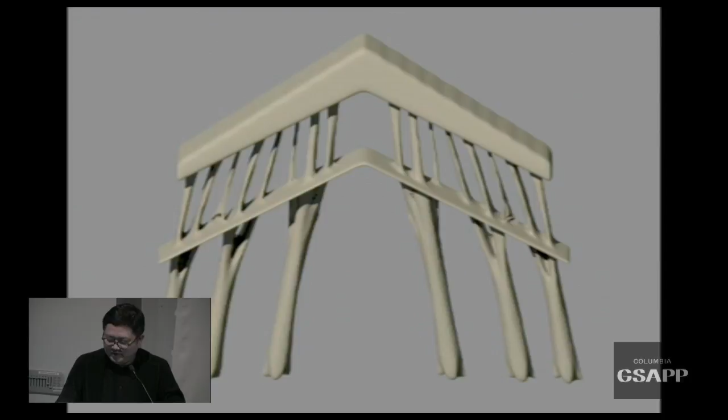This is an interesting structural performance simulation put forward by Mike Xie, who is a colleague from RMIT Australia. He made a very interesting simulation with hanging of one point and two points. With one point hanging, the apple is the best form in the world. And with two points hanging, the best form is the Catenary arch. Also the simulation of the Sagrada Familia, the facade designed by Gaudi, is also based on this kind of thinking methodology. So from this kind of simulation, we can understand what is the best form in the world.

So in the lecture of Mike Xie, I put forward a question to him: if you're talking about the hanging, the apple is the best form, why do we have the pear? It also has a hanging, but it looks different to the apple. So that is the question to the simulation, this kind of technology.

Are they saying this kind of new method will totally change the thinking process or replace the designers? So the question Mike Xie gave to me is that not only the hanging point, but also the seed of the apple and the pear are different. And another force is growing as a nutlet in the middle of the apple. We also have other forces that change the apple and the pear, making them grow differently.

So I think humans and machines right now are collaborating with each other. It's just like the hanging point, and also having a core, a seed inside the core of the creatures. We produce a different formation process of nature.

So tonight I would like to put forward three topics, from new materialism, to craft-driven materialization, to human-machine association.

New materialism moves us beyond the discourse of representation to a discourse more aware of material process and expression. Yet it's not that new materialism seeks to displace or dismiss the representational logic of the late 20th century, as if it were redundant. Rather, it seeks to emphasize that after years of stressing the importance of representation, we need to redress the balance by paying greater attention to process. Indeed, the two discourses, of representation and of process, are not mutually exclusive, but one invites the other.

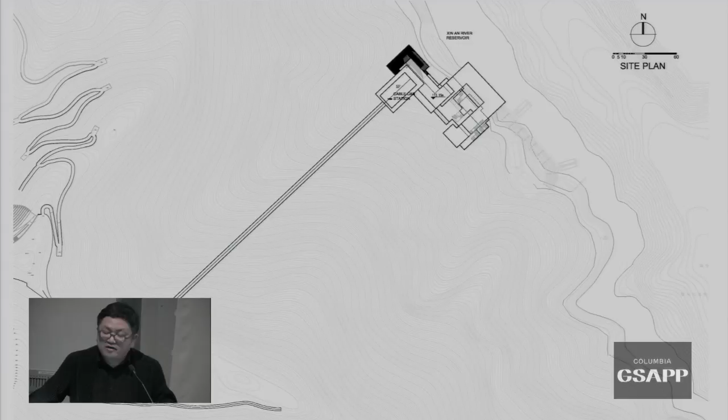So we were thinking about the new landmark, how it can embrace new travelers and also bring a different experience to visitors. The original concept is to integrate the building with nature, and how this kind of building can grow in from the mountains, and also anchor into the rockeries. I hope when you have a first glimpse of the local scenery, it should be difficult to figure out where is the building and where is the nature. So that follows Chinese philosophy: man is an integral part of nature.

Well, how can we manipulate the design process to realize the conceptual goals? Here is the formation process. We define an agent system that could represent the simulation process of how the rockery of the mountains grows up. And the protocols represent the intelligent rules of how to predict the future growing process, from the rockery to the building. So the basic logic comes from the local topography of the mountains.

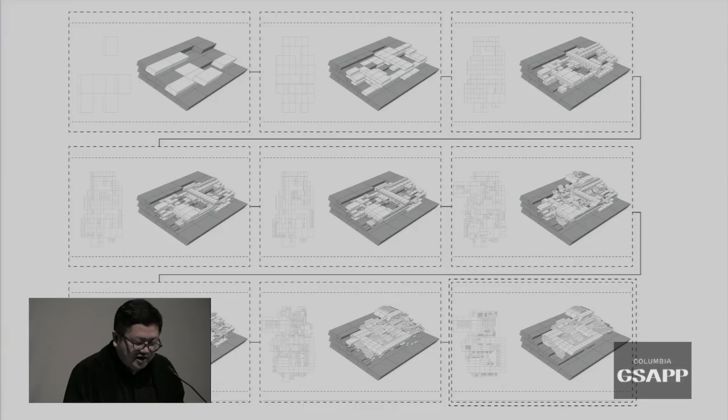So architecture is the landform we're looking for, and the landform is the architecture. This is the form-finding process, from the prototype, by a bottom-up process, to simulate how the building grows from the rockery, expanding out to fit into different kinds of functions of the buildings.

So these are models we made, and here are the final models to represent the process. But actually the process is not just a final result — it's a growing process, how to integrate the programs with the geometry of the mountain.

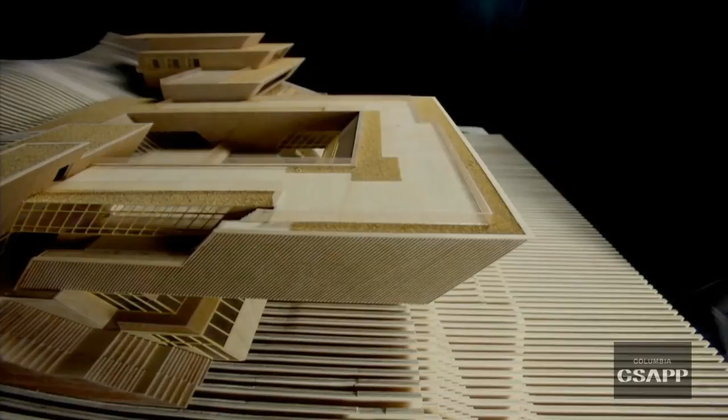We have a very big cantilever reaching out to the lake. So we have a beautiful scenery in front of the mountain, and the cantilever makes a shading space for the parking, and people can come in and sit outside as the entrance of the national park.

The cantilever is 30 meters, very big, pushing out from the mountains. It has different floors. The plans are still in the design process, because different heights need careful operation of different details in the design process.

You can also find the reflection of the water and the integration of local material. It's a kind of laminated bamboo. We use it as a facade for the building to make it very close to the local materials.

We also set up different systems, including the structure system, most importantly because it's a big cantilever. It's a steel structure system anchoring to the nature. When we make the construction, it's a very complicated process involving different kinds of structural simulation and optimization.

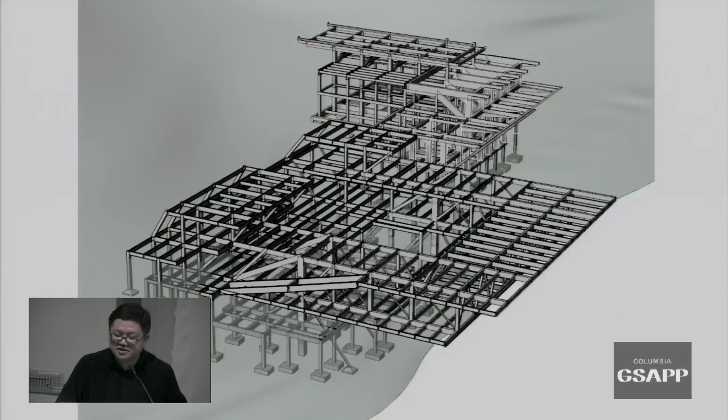After finishing the building, when the cable car comes down from the mountains to the platform, you can find the frame of the building framing the beautiful scenery in front of you. It's just like standing in nature, and the frame is set up at a certain distance from you to the nature. So this part is finished.

You can see the building with the mountain, the building with the lake, and boats boating on the lake.

I would like to highlight the final images. Here is the original concept of the design: how to integrate the building with the nature.

The logic of the form-finding process comes from the prototype of the rockery, growing into a certain form fit to different kinds of function programs. When we leave the site, about 1 kilometer away from the buildings, it's difficult to figure out where is the building and where is the nature. That is the dream. Also in the philosophy of China, the building should fit into nature—it's growing together. That is the basic idea of how the growing process, the form-finding process, makes the whole design concept.

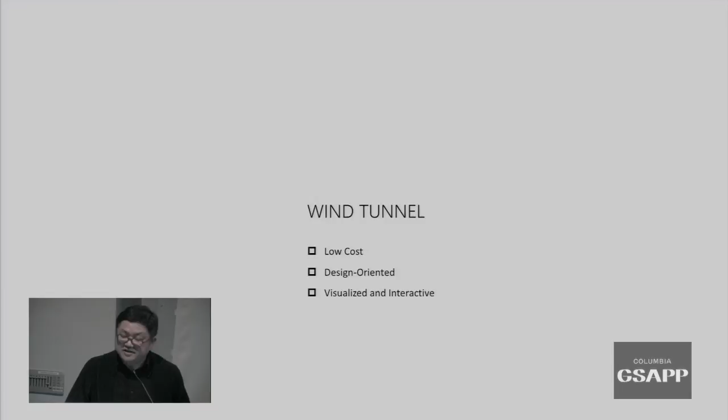The second part I want to introduce is another tool we developed in our office: the wind tunnel. Normally the wind tunnel is in a structural engineering school—they spend a long time researching it and spend millions of RMB. It's very expensive, and normally difficult for designers to use. But we're trying to develop a low-cost, design-oriented visualization process for use in the design.

So the wind tunnel could be part of the design partner in the early design stage. This is the first wind tunnel we made. It's around 4 meters long, something like this. The first one could simulate at a scale of 1 to 500 or 1 to 1,000, but this is too small a scale.

So we made a second one. This one is 12.3 meters long and can simulate at a scale of 1 to 200 or 1 to 300 for high-rise buildings.

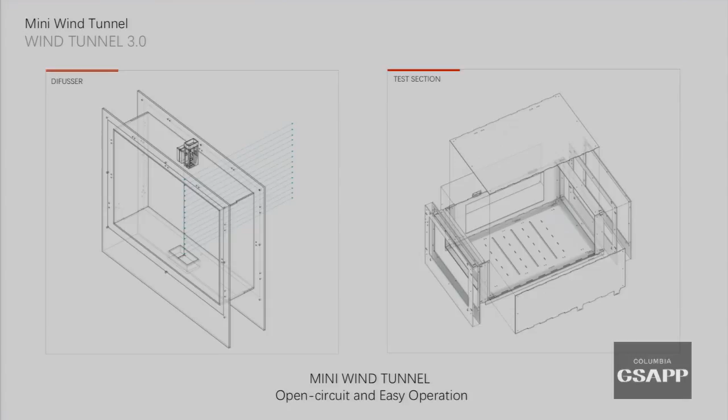After that, we change different sections of the wind tunnel to help us make different kinds of simulation. The left one is about smoke wires, which can visualize the wind passing through the buildings. The right one lets us change the location of buildings in the urban environment to get feedback on how ventilation and wind can change the formation process of the design.

So this is the real one—we change different things. This is the smoke wire process. We put in high-rise models, like Lego, in the early form-finding process in the wind tunnel, and use a camera to record videos, slowly revealing how the wind passes through.

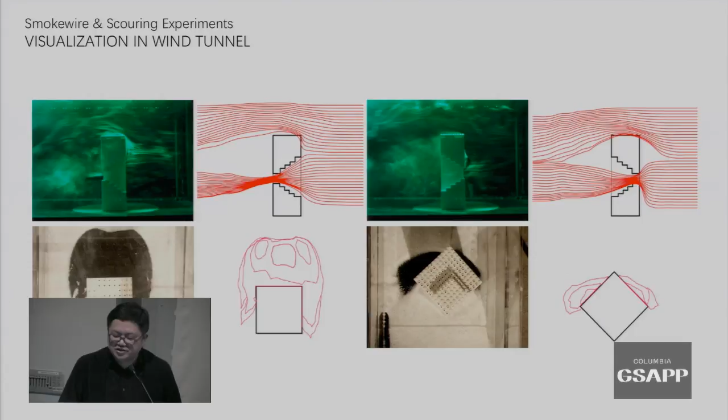We also use scouring experiments, putting sand on the ground to test pedestrian-height wind conditions, giving feedback on wind patterns at the podium of the architecture. Here is another simulation: the left one is the smoke wire simulation for a certain building height and typical plan geometry, the right one is a CFD simulation, and the bottom tests pedestrian-height wind performance.

Through these kinds of experiments, we can very quickly get feedback on different geometries in the design process.

We also try to use not a stable building—not just one single building. If we have 3 or 4 buildings, we can change the location and change the initial logic for the form finding. This is a twisting system we make through Arduino.

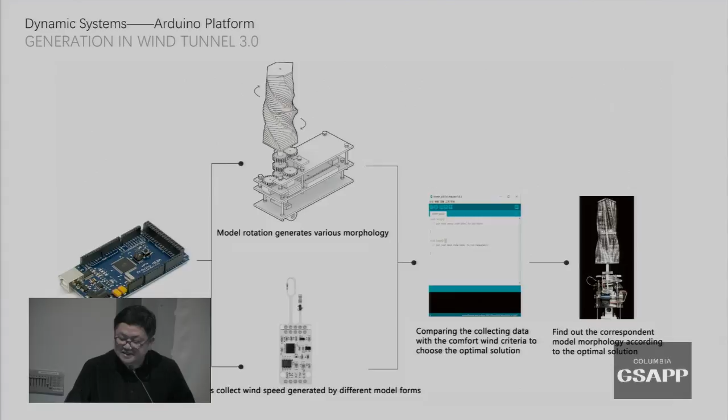So this is the process for the form finding itself—the twisting by the location of different buildings. The result is interesting because we can figure out if the podium should be twisted or the top should be twisted; different angles will make different geometry for the high rise.

Based on that, we participated in Shenzhen Biennale 2016 and won the award by the methodology we used in the wind tunnel. So it is a huge model.

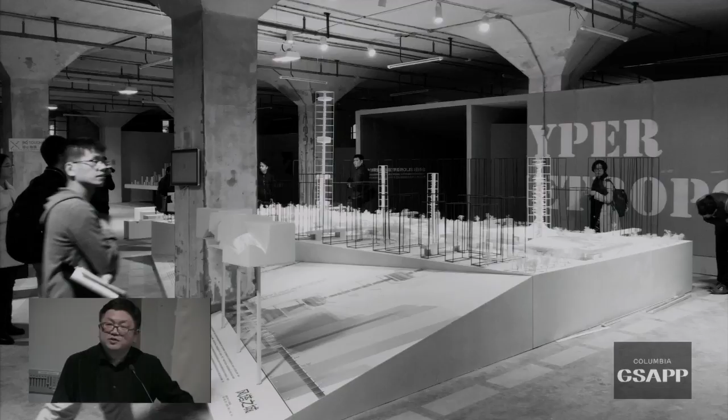We made research on the isolated district between Shekou and Qianhai, two districts. Originally it's a very long railway track, keeping like 80 meters width and 12 kilometers long. We tried to make research on this district.

We use the idea that we can design a certain kind of infrastructure system. I think in Shenzhen, if you visit China, it's a very good location for living because people can live there maybe all seasons and stay outdoors. If you have a shading system or good ventilation, it will be very comfortable to stay outdoors.

So we try to put forward the idea that we can design an infrastructure system that can control the pedestrian height and the wind speed, so people would like to stay outdoors and enjoy high density street life. The infrastructure system for the high-rise is not programs like apartments, office, or hotels, but could have some public function for the city.

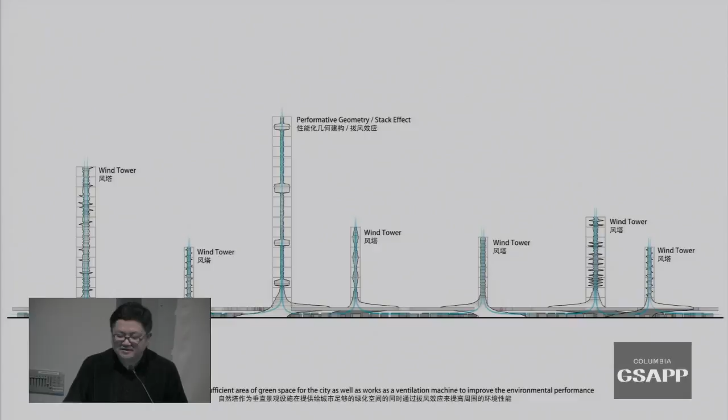This is the matrix of the wind tunnel, the wind tower, which can control a certain scale of the urban space. If the wind is comfortable and the shading is comfortable, we can produce a very livable space in the city. That is the basic idea based on this kind of new technology simulation.

So we can see the video in this waste isolated land in downtown Shekou. The right hand is Shekou, the left hand is Qianhai—a very representative developing district. But in the middle is isolated space because of the railway cutting through. So the government wants to reuse this piece of land.

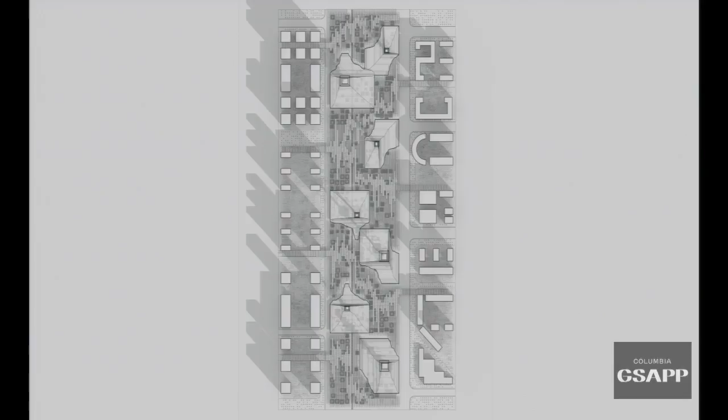So we put forward the idea to set up an infrastructure system to change things. Maybe in the future it's a bottom-up development process, and this kind of big canopy with a very high chimney or wind tower can control a certain scale of urban space and make a different urban future.

Although the typology in China is all high-rise similar to New York City, in the Shenzhen Biennale we tried to put forward that the infrastructure system should not just be horizontal for pedestrians, not just hidden underground, but could vertically change the urban quality and the wind—putting a bird tower, a plants tower, and observation functions in the buildings.

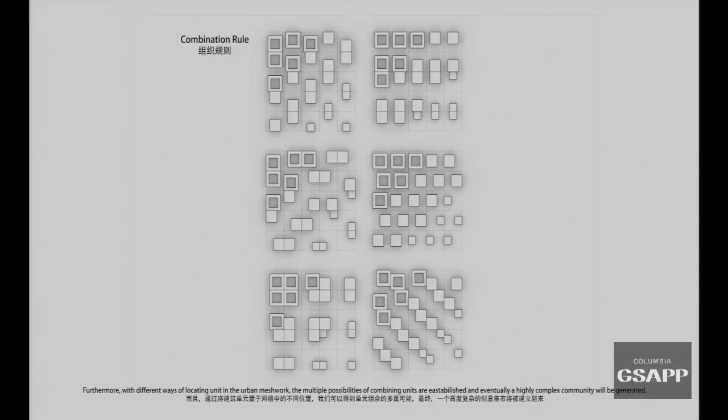We also make some very small, high density, super high density blocks on the ground which can grow slowly in the city and could be reorganized by itself. Maybe it's a utopian process, but we put forward this idea for the future of Shenzhen.

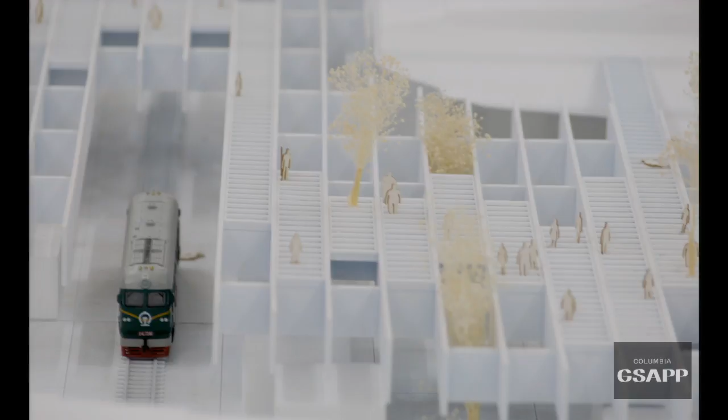So the infrastructure can link two parts of the city, and based on the traditional railway, we can make some commercial programs under the shading of this super big scale infrastructure system, and the wind tower can produce some public functions for future cities.

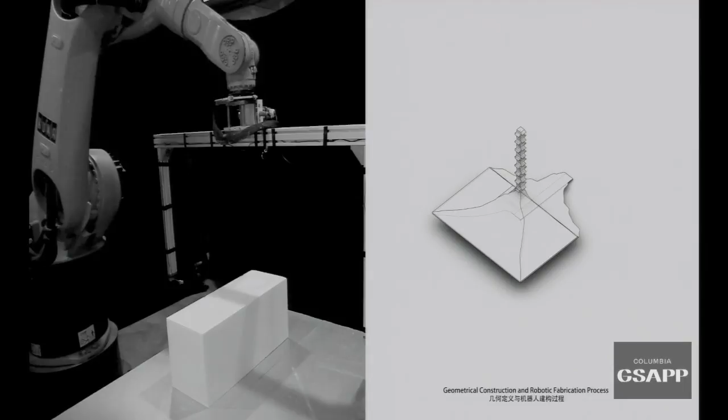So the model is like 100 square meters. It's a very big model, but we spent only one month to do it because we used this kind of robotics to cut and make the formation process for the high-rise.

So this is a podium for the high-rise.

Okay, this is one project, so it goes to the second part. I would like to talk about some of our early work, craft-driven materialization. Some of the projects are based on the understanding of new materialism as a generation process in mere material itself. We have also begun to deeply explore the human-driven material formation process. Here, what I mean by human-driven is referring to the production aspects of the building life, rather than going into the discussion of constructing particular human experience. So craft also becomes a driving factor in our design process, to review the relationship between the human and the building form in the materialization process.

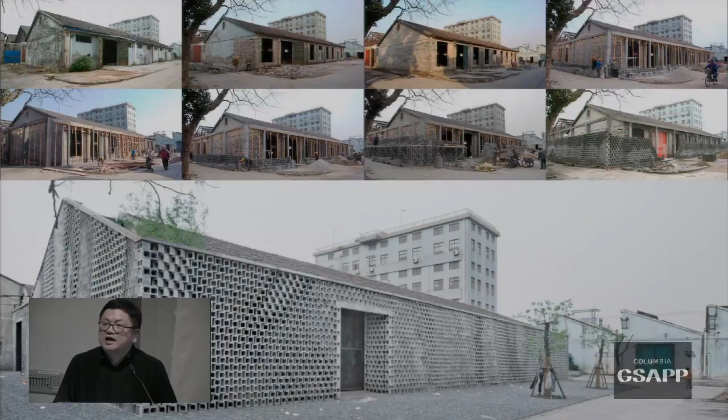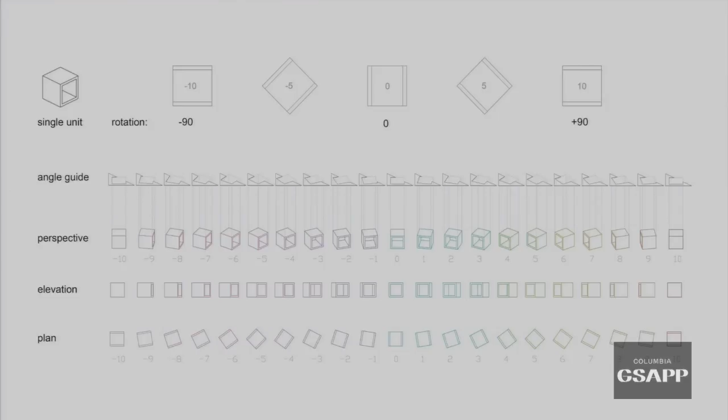Bricks are an extremely cheap material on the construction site, so we selected them and made a design using this kind of diagram. The detail drawing here isn't detail like other buildings, but we designed a certain kind of ruler - like a modular system - to label them with different numbers in the detailed drawings, and to teach the workers how to position them in the right location. Just place the ruler there, and the workers can put all the bricks in the right location.

These are the local workers we worked with - they spent only about 2 months to construct the whole walls of the building. The elegant detail of the facade comes from this kind of rotation - rotating the degree of the bricks can create different kinds of performance for the facade system. So this is one of our early works.

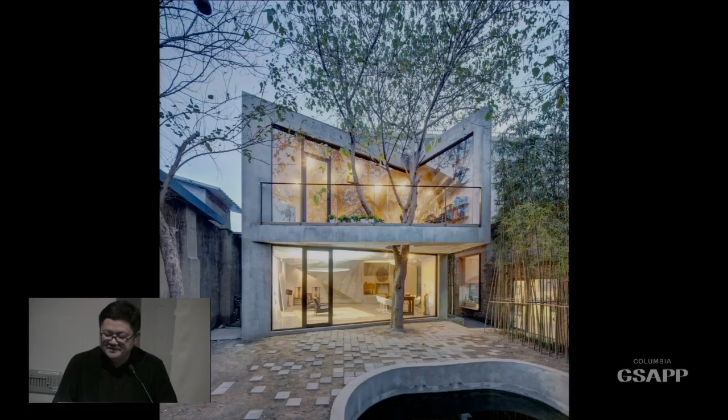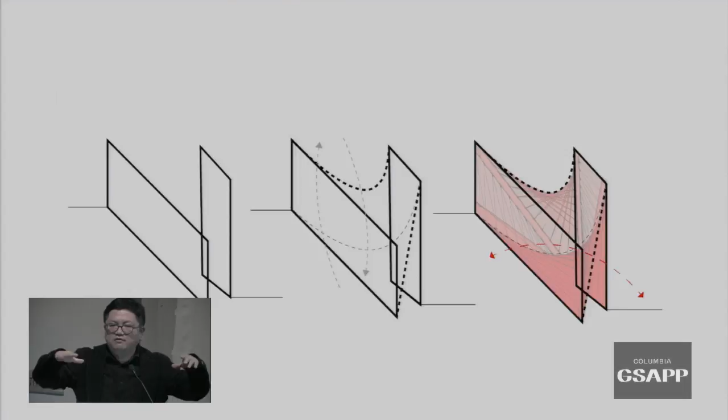So the geometry sets up two kinds of frames - one is the entrance of the stairs, another is when you're passing through to get to the second floor, you have a frame of all the leaves and trunks of the trees. So it's two geometries, kind of a transformation through some roof surface for the design.

How to construct it - 10 years ago we were facing this kind of problem, so we made a 1:2 model in the corner and taught the workers how to construct it, because from drawings they could never understand this kind of very complicated geometry. They couldn't construct it, but following the model, it was easy for them to position and construct the whole building.

After that, in 2015, we were thinking about how, from these basic fundamental tools, we could generate something more meaningful. So this is a Fab-Union Space on the West Bund of Shanghai, which is a gallery space for exhibitions. We have two kinds of programs - the right hand is 25-meter tall buildings, the left hand is a 3-story floor. So how do we make a connection between them? We have a special circulation space in the middle.

We were thinking about this because concrete structure can never have a span like 50 meters, so we wanted the circulation to become a structural system - how the structure system could be not only the circulation system but also the structural support system. That's the original concept for the design.

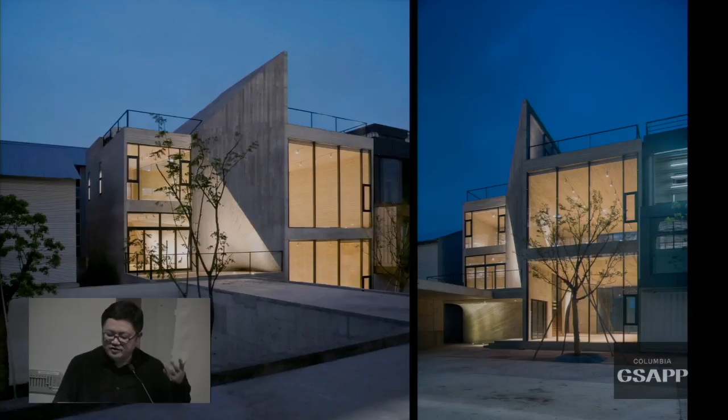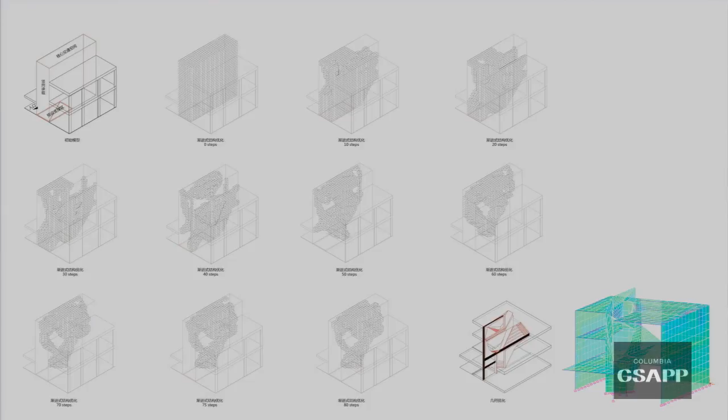So we just reduce the material step by step, generation by generation. This is a process where we take a whole solid concrete block and reduce the material. We make models to present this building in the GSD exhibition last year. The left one is a solid concrete system, and step by step we take away the concrete material. Using this kind of BESO algorithm structure optimization tool, we can find a form like this. So this is the design process.

So in this case, it's totally different from the first building we presented, the tea house. The tea house geometry is just a form, but here the geometry transfers into a structure system.

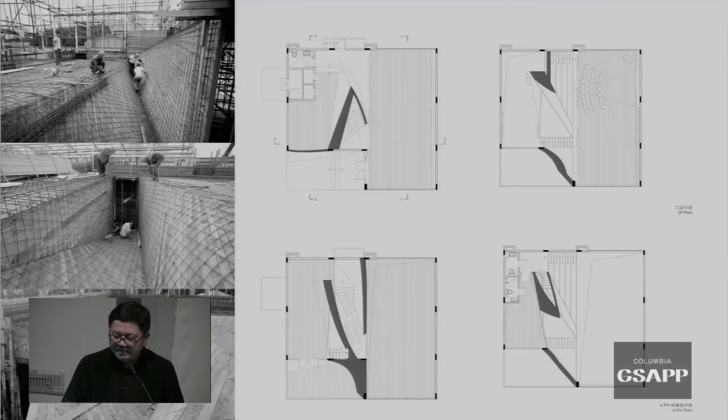So in the construction process, we need to think about how to construct the buildings. From the plans, we can see the wall and the floor look very thick, but actually it's not so thick - it's just because in section it appears very thick. We drew a lot of sections and tried to teach the workers how to construct this building, but it never worked, because these sections can never represent the real depth of the floor - it's all diagonal, cutting through it would be extremely wasteful.

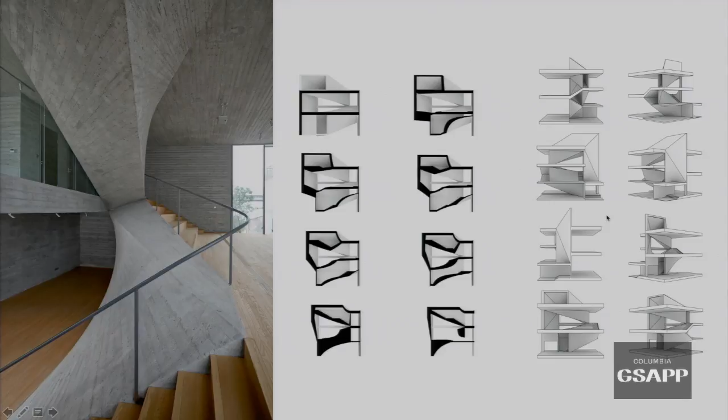So we made a lot of models to teach step by step, floor by floor, to the workers. The models became very useful in the construction process. So after the building was finished, it looked something like this.

The folding walls became a support structure system for the whole building. This isn't visible from the exterior. Normally a building transfers forces straight from the upper floor down to the ground floor, but in this building, based on simulation tools, the forces are transferred in a folding path from the second floor to the ground floor. And the inside edge is stairs.

For the light, we use two kinds. One is the roof light, washing the concrete wall. The other is parallel light, also washing the whole space. So we're showing two kinds of darkness on the concrete, revealing the heaviness and volume of the whole building - a very strong experience when passing through. At night, the building lights up like this.

So when we go to the second floor, you can see the left hand is the outside stairs, and the right hand is the inside stairs. Going from outside to inside, this folding and unfolding process gives a totally different experience.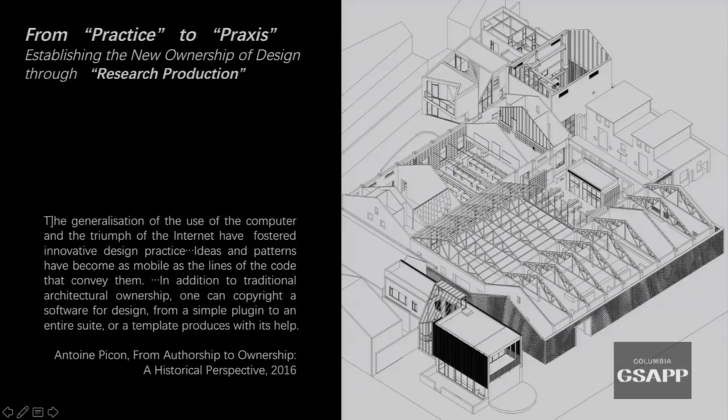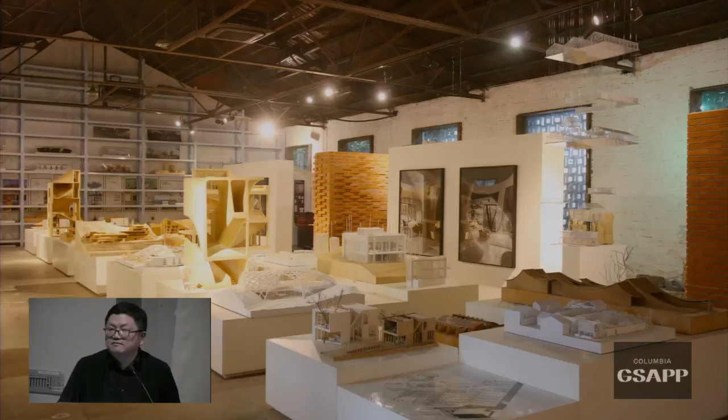In the exhibition space, we can figure out all the models tracing what we're doing, different kinds of experiments in all of our projects. Actually, a lot of mock-ups, one-to-one scale mock-ups in the office, because we try to test the material, the making of material, and to redesign the process of materialization of future architectures. And also in the laboratory, we have a lot of tests, and most of them test to failure.

Through this experimentation, we want to establish a new kind of credibility. Because the credibility for the future generation is not just meaning you can design a building, but if you can design a tool, it's also meaningful. Actually, the signature and credibility for future architects could be based not just on making a spatially meaningful test, but also on setting up a new kind of tool with you in the office.

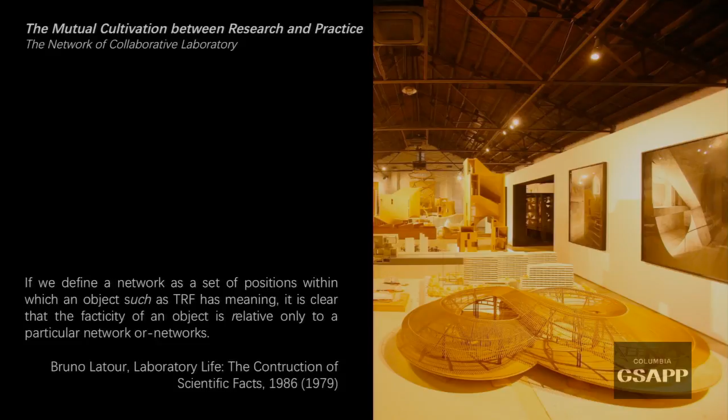In this situation, we're trying to figure out the relationship between what is practice and what is research. We could create a very interesting relationship between design research and building practice. Analogous to Latour's notion, what is the scientific result of future architecture, which has meaning to position us in new networks? The networks are not just one university, one professor, but should be networks of a lot of new generations—artists and architects from all over the world, and professors from different places coming together.

That's why in the last 7 years we set up a Digital Future Shanghai special event. We make a group research on robotics. We try to set up a new model for future research.

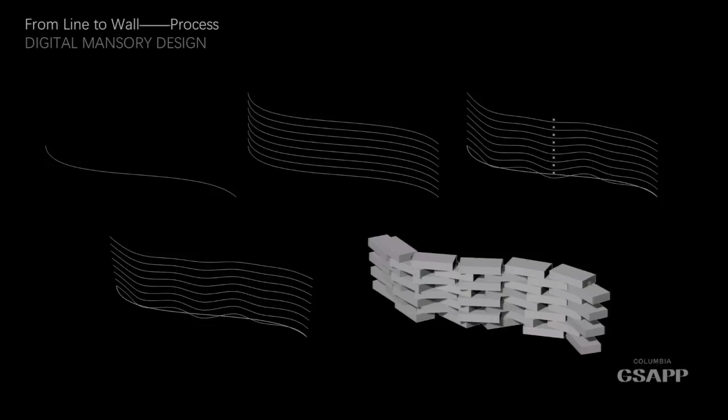For example, this is just one example on the research of bricks, from line to wall, how to use Grasshopper to find a certain kind of form. This is also another Grasshopper model to set up different parameters. The parameters can change—we can change the information, the data, to make different kinds of forms.

But the form is not easy for construction. Based on our tools, it will be extremely efficient if you want to make any brick, any form based on the bricks. And also this is from surface—not from line—from surface to the wall, from box to wall. We have different kinds of toolboxes developed.

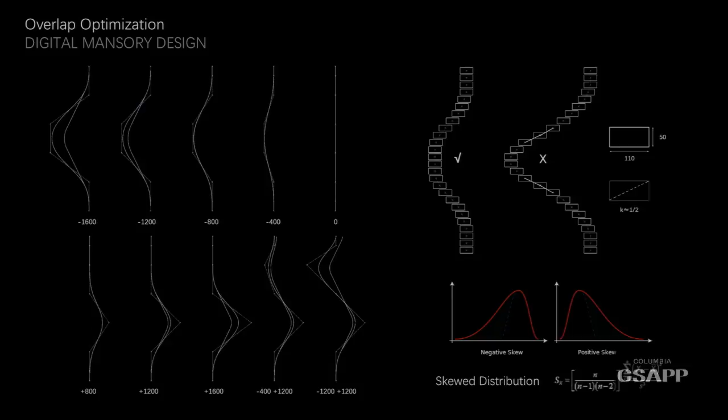The most important thing for brick masonry is the overlap part, because that should be based on finite element simulation and optimization process. The overlap should be carefully calculated in the computer by the structural engineer. But based on certain kinds of tools, we can implement the Grasshopper plugin tools to design the reasonable form of the brick walls.

So this is a process of how to put the rebar, how to organize it, and how to bend the rebar for a certain kind of twisting in this kind of brick wall. It's all toolbox development—this is just one example.

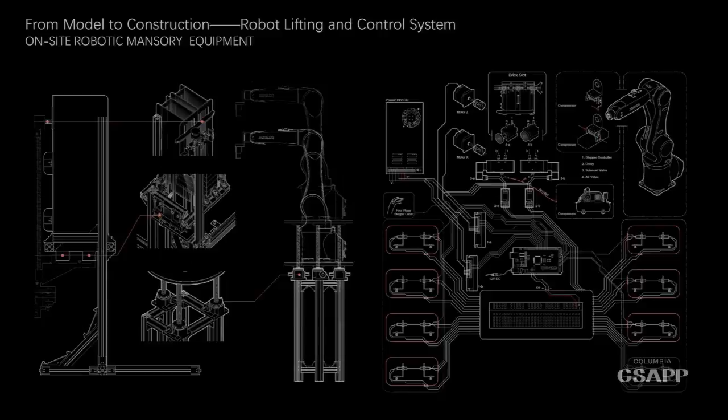So we develop not just the design process, but also the tools—the on-site robotic masonry equipment. This is generation 1, which we developed in 2012, from model to construction. We use these tools to feed the bricks and make the equipment work. With this machine, we first did this wall, because the twisting wall is all different—we needed to position the equipment 4 times on site to place each brick.

But this is too small—the robotics is very small. It's not very efficient. So we developed a second generation. It's like this.

So this is all the drawings and the robotic tools we developed, including the motor feeding system, and also this is the bricks, how the bricks are supplied to the robotics. These are all the details we did.

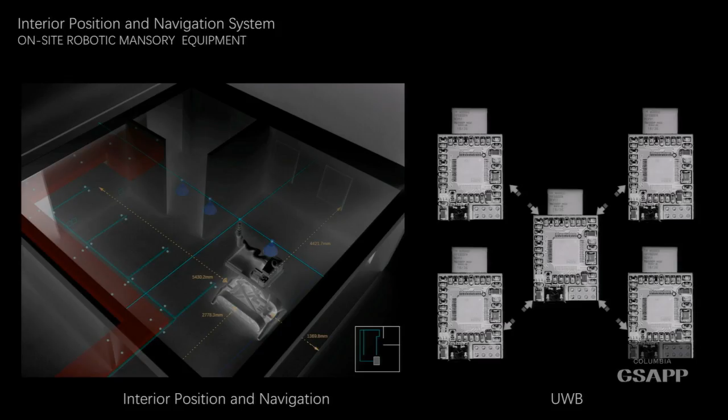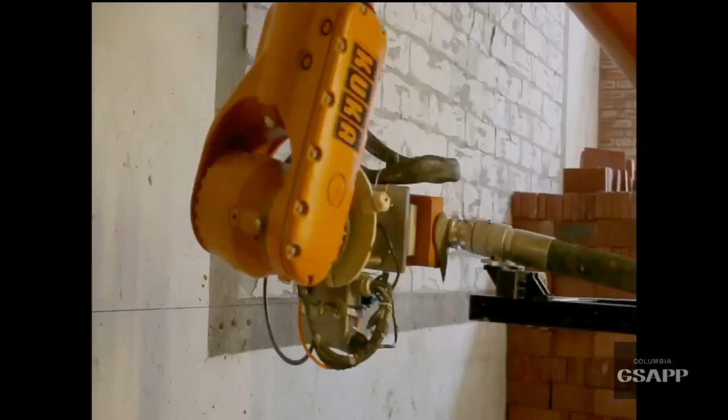This is a simulation in the computer, and the construction I will show you like this. This is the tool we developed. And still we need workers to clean up all the details, but this is the basic process. One of my PhD students is doing this.

Using this special generation 2, we make the wall like this. The brick layer walls, the inner layer is the insulation, and another layer is the concrete — a sandwich system of the architecture system. Architecture facade system. This is the building we design.

We teach the fabricator to buy several robotics for their factory to make the wall. It's prefabricated in the factory, piece by piece, sandwich style, and hung on site, floor by floor. So this is the process.

I wanted to put forward the example of human-machine collaboration. For the designer, it's not just designing the facade, but designing the whole process, including the equipment, including the tools, how to construct the building like this.

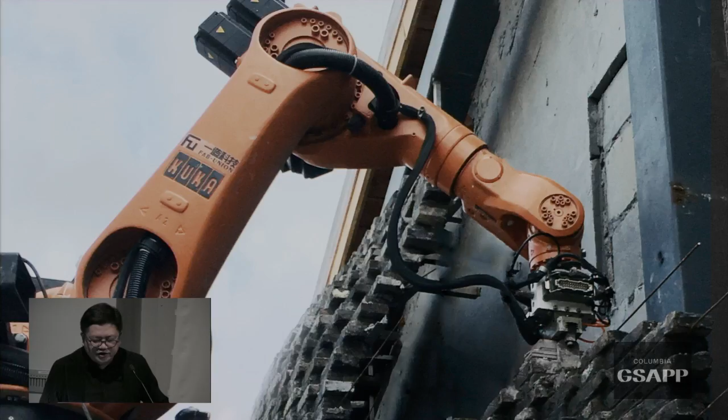Another one is Chi She — this is on-site work, not prefab. We went to the site, and this time it's more challenging because the location is west of Shanghai near the Huangpu River, near an airport district, with a lot of waste warehouses and waste bricks everywhere. It's an urban renovation project, and two artists want to develop an art gallery space.

So we shrink the initial exterior walls, followed by performance and structural refinement, in order to provide maximum exhibition space. The concept is to gradually change the bricks, from wall to rain shade canopy — kind of from typography to the topography of the space.

The integration of reused bricks on site — because this material is rough and not accurate — but the robotic can do it very accurately and precisely, putting them in the right location. It's very interesting: very rough bricks made into a very precise and accurate position, making the building very special.

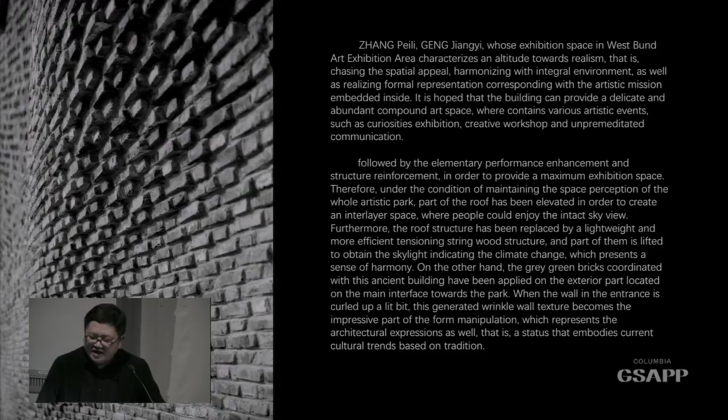The bricks coordinated with the building have been applied to the exterior part, located on the main interface towards the park. The contrast between this roughness and the accuracy makes the building special. This is the facade in the poster, and the actual location is here on the riverfront of Shanghai.

The design process is not so easy. Actually, as architects we evaluate using structural performance imaging tools to simulate displacement, stress, and wind load, and also how to integrate this kind of structural performance to design the density of the material and put it in the right location.

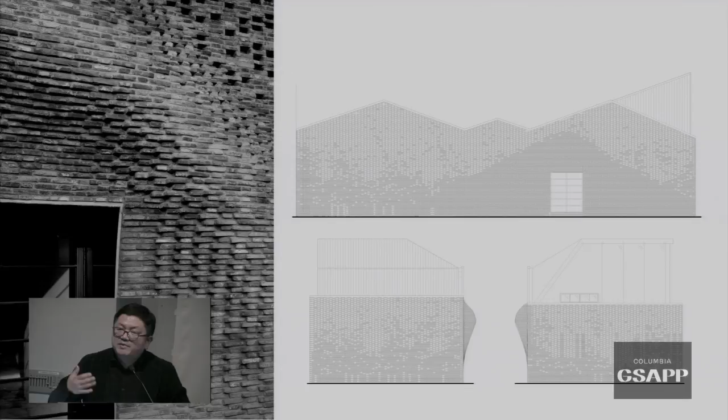It's all a form-finding process to simulate precisely brick by brick and teach the robotics how to construct locally on site. We also have some steel structure hidden in the back.

The roof structure has been replaced by a lightweight timber structure. We also designed part of the roof to let light come in and illuminate the special wall, creating a special space for the gallery.

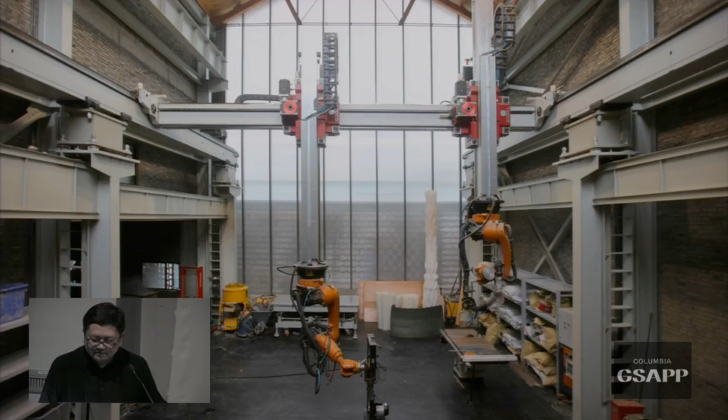So this is the lab, and based on that, I'd like to introduce a project finished two months ago — collaborated with Achim Menges and my team. Martin, one of the PhD candidates from the University of Stuttgart, came to Shanghai to collaborate with two of my PhD candidates, and they spent 1.5 months in my lab constructing the whole pavilion in Shenzhen.

Shenzhen newly opened a contemporary art museum, and they collected these pieces — it's still being exhibited in Shenzhen right now. We use plywood as the material, and the sewing machine serves as a special tool to create a new material performance for this installation.

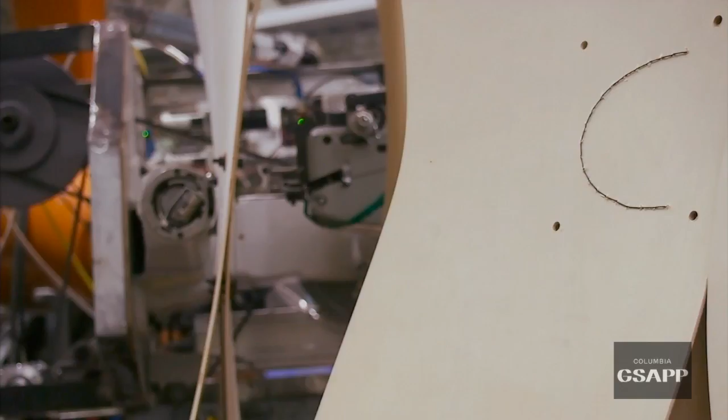All the details are specially designed, and the whole formation process is based on the structure. By folding them, we create a self-supporting system that stands up by itself without any hanging material — a self-standing structure made of two layers of plywood, sewn by the machine to make certain joints.

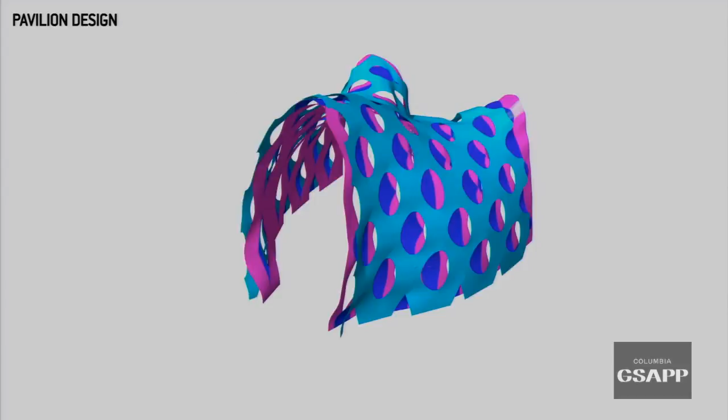The sewing material is carbon fiber, 2-centimeter radius carbon fiber, weaving the wires through the plywood, which is 3.5 millimeters thick. We cut it using a 5-axis CNC in my lab, piece by piece, cutting all the components, then folding them into certain forms and sewing them with robotics.

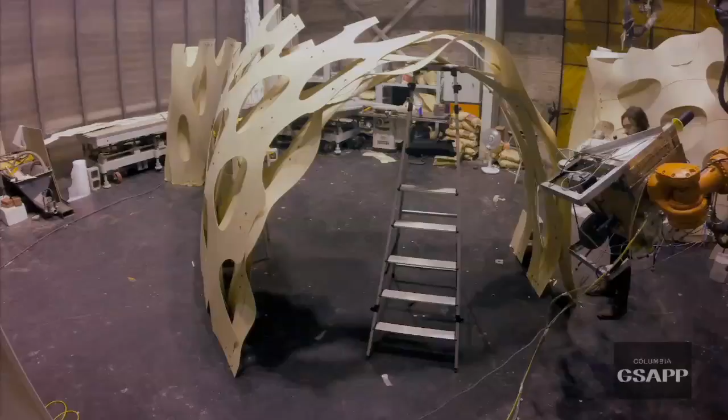This is a future architect's work. You not only design and model in front of your computer, but participate in the whole making process, including inventing certain tools to make certain forms and pavilions. This is only the pavilion.

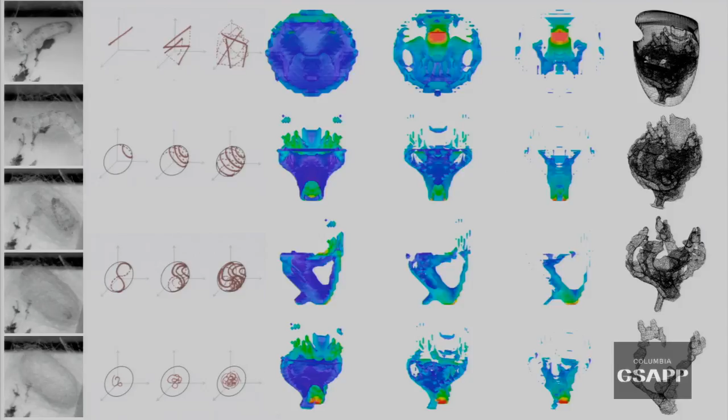This is from my undergraduate student studio. I asked them how to print a chair. The methodology is the same: structure-performance-based design using the density of the chair's structure, which we translate into tool paths. We developed 5 prototypes with different lengths of printing paths that can print at different densities. This is the final result of the undergraduate studio work.

This is another one, showing the tools we put in the studio. That one is a simulation, and this is the real one. Although there's some difference, the roughness gives this chair an interesting quality.

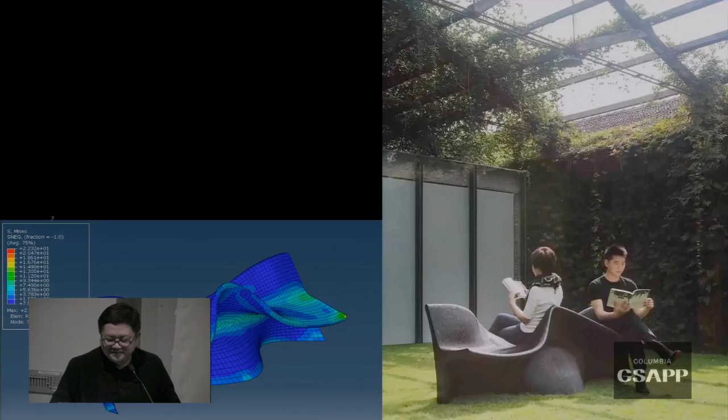We also designed a triple-person bench project, based on a geometry form-finding process and structural simulation to ensure it could stand safely.

This is the rendering and modeling process, and this is the structural simulation process. The whole printing process took only 15 hours, so it's a kind of customized product. In the future, with good design thinking, you can make things yourself as a student, even after graduation, and set up your own furniture-making business.

This is a single chair made by one of my students. With different material percentages, we can achieve different materiality. This bench printed in only 7 hours. This chair...

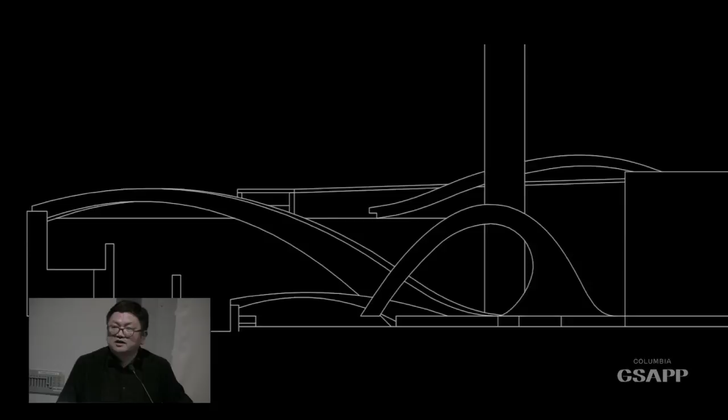After that, we didn't think we should just print small chairs—we wanted to print structures. So we tried printing a wave bridge inside our university. This is in front of our building C.

One bridge cuts through from the ground floor to the basement. Another cuts through a small pond. The big one has a net span of 11 meters, and the small one is 4 meters.

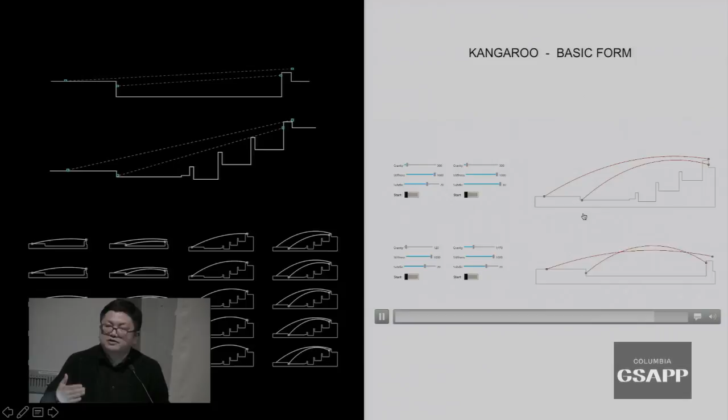The whole design process starts with Kangaroo, a structural performance simulation, to find the form of the double curve—the upper and lower curves—and between them we place other material. This is the first step, using structural performance simulation to generate the form.

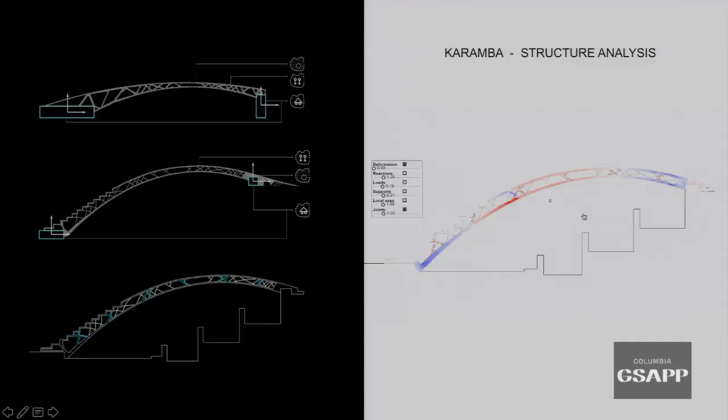But it's too heavy—we can't make it in one piece, so we need to cut it into different components. We simulate this with another structure software, Karamba, also a structural simulation tool, used here for the details.

After that, we print it. The printing path is the minimum path, saving material. In total we spent 320 hours, using 3 robots printing for 7 days—about 8 days in the workshop.

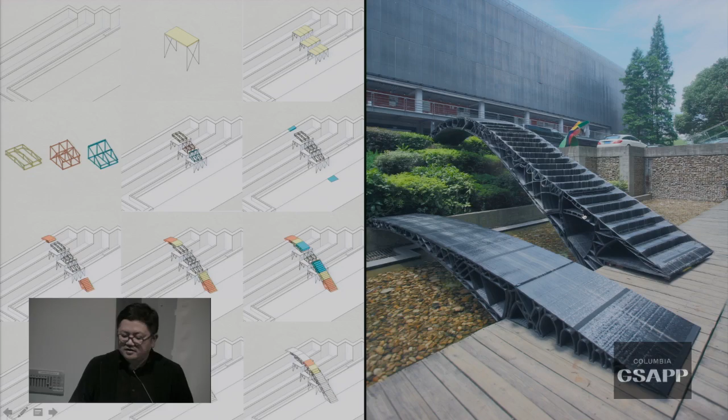We printed and constructed them in a very short time. The construction process needed careful design—how to put everything together safely, step by step, to set up the building. This took 20 hours, from morning into the night, with some students and 2 workers constructing the whole bridge on site inside the university.

Early in the morning, I was asked to be the first one to pass through the bridge. It was around 8 o'clock in the morning—a special time to be recorded. I was a little bit scared, but it was safe.

After printing the bridge, a lot of students and professors—not only from our school but also from the material science and structural engineering schools—asked many questions and offered interesting suggestions for future study.

At the opening exhibition, Patrick Schumacher came, and the two of us passed through the bridge together. This is that moment.

The most difficult part is how to make this geometry stand. We need to use different kinds of software to simulate the structure system, and how to simulate the density - which part should be strong, which part could be weak. So it changes the density of the material. It's the same as the chair.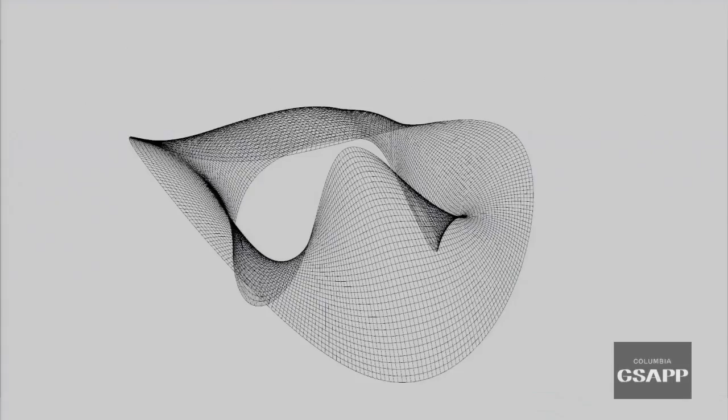We're teaching students to print the small chair, and we're using the same methodology at a large scale. Different density represents the 2 paths - printing long or printing short can control the density of the whole pavilion.

This one we printed over almost 1 month. The whole simulation process is done in Grasshopper like this. All the printing paths are simulated in the computer first, then simulated in the printing process by robotics. We printed them using 3 robots over 1 month.

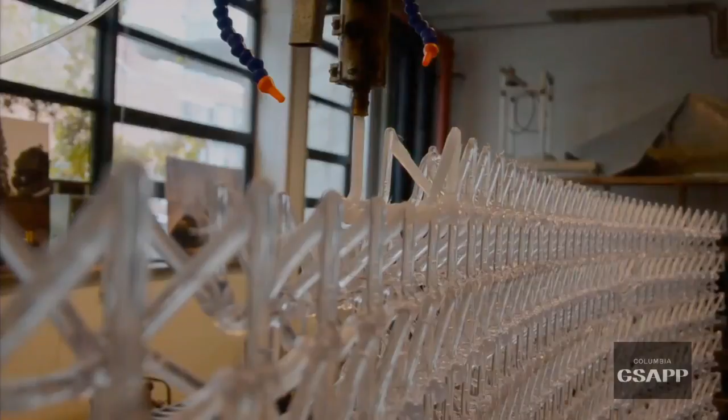This is the printing process using this kind of plastic, step by step, 24 hours. After construction, it looks like this, self-standing safely. When hidden in the greenery, semi-transparent, it gives quite a different feeling in nature.

In the opening of the art season, RCR - one of the principals - participated in the opening, along with Yung Ho Chang, and also Evan Douglis from RPI was at the event.

Right now what we're doing is for the Venice Biennale, for the China Pavilion - we're printing a cloud village. It's not just one building. So in my office today, all the robotics are still printing right now.

This is the first public announcement, made here in Columbia. The pavilion will be exhibited at the end of May in the Venice Biennale. It's one of the most important pavilions in the China Pavilion.

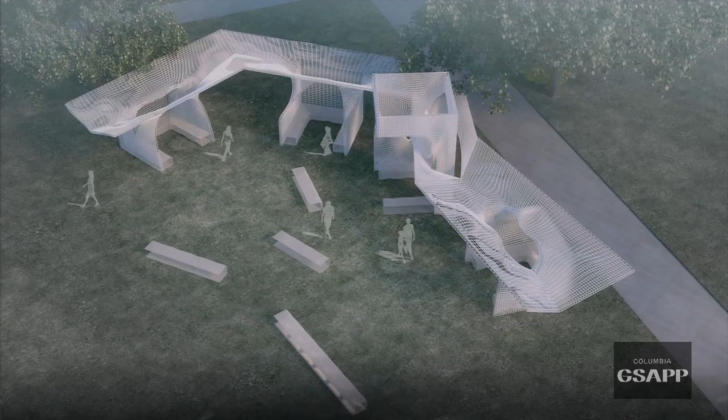In total it's 250 square meters of surface material. Not only is the plastic reused material, which is very meaningful in China, but we can reuse different kinds of plastic in the future if we implement this technology to print structures or installations.

At the same time, robotics works alongside traditional methodology - we're moving very fast through this. The left one is our research, the right one is our real project.

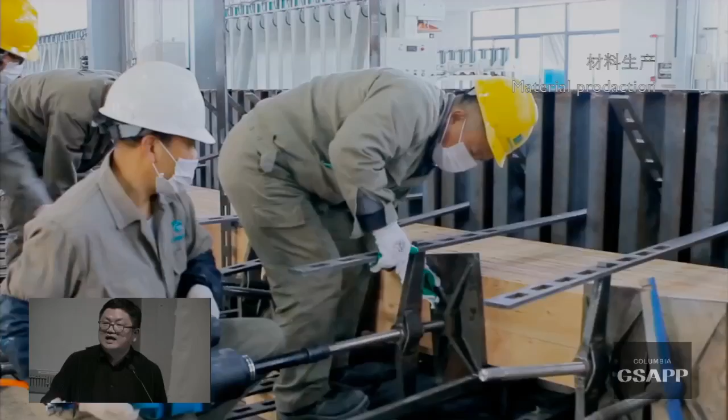This specialty is the traditional laminated process for the timber structure industry in China. But we help them develop and update the timber structures. These are the tools we developed in the robotic factory - we can very quickly cut the curved beams and curved columns.

These are tools we developed to teach the fabricators, the industry people, how to work precisely without any issues - it's a self-support system for the future building system.

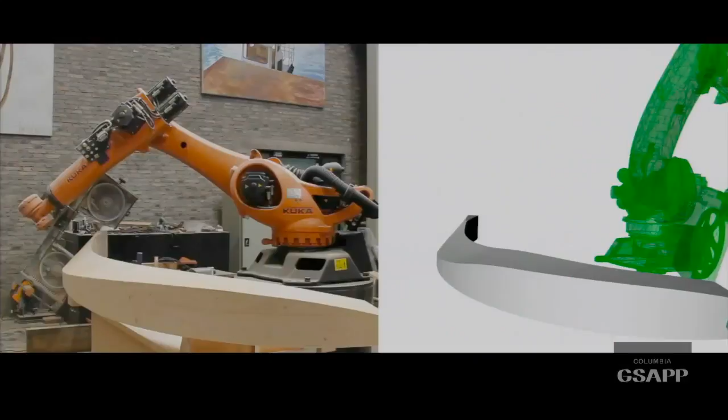The right one is a simulation in the computer, and the left one is the real production making process. This is what future architects need to understand - what your job needs to be. If you can connect directly from your office to the fabricator, that totally redefines the discipline of architecture.

So this is a pavilion built in 1 week. In the Digital Shanghai workshop, we made the left one. Then 6 months later, we designed the expo house for the horticulture exhibition in China - the building.

This is the construction process. All the beams are curved, and it's a double curvature roof system. All the joints are different. How do we make the joints? We needed to develop special tools.

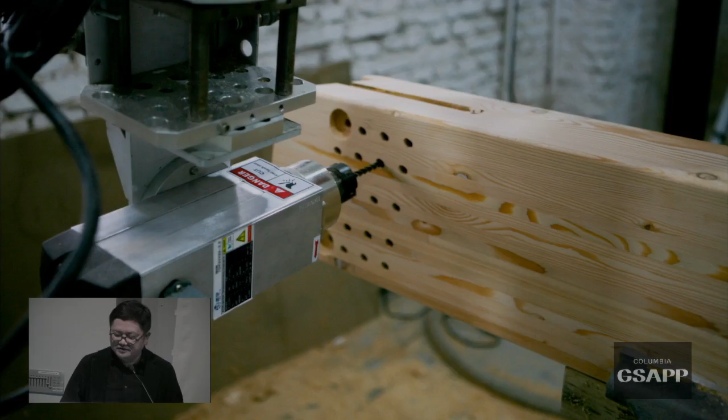We are not the fabricator - we teach, but we teach the fabricator how to update their tools. Because this is a diagonal pattern, the human body cannot make very accurate angles to pattern through, but robotics can do this precisely and efficiently. So it is a design process.

Moving very fast through this - the double curvature surface of the building is a self-support system, all compression of the material. The joints have some steel components in the middle of the timber structure. It's all diagonal, so the traditional industry cannot make it.

So we developed only one robot and taught them - every joint takes 40 minutes to mill precisely for this building. My office sent all the files from Shanghai to Suzhou to the factory to make everything. That is the future work the design office needs to do.

The special part is it's a diagonal, yeah, precisely.

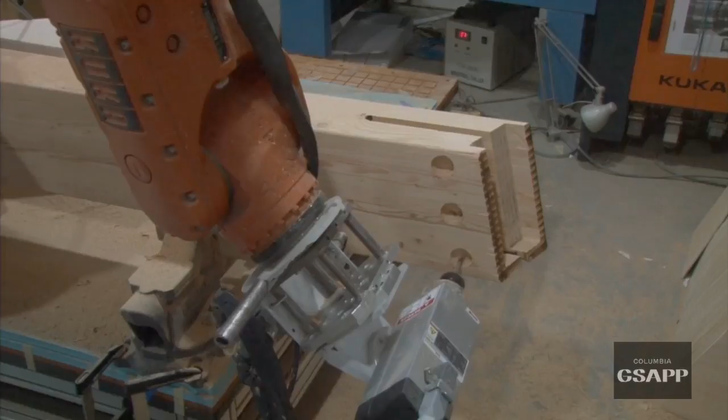So after construction, the space is like this. It's double curvature. All the joints are different.

So the last project is the In-Bamboo project, in a village in the rural district of China, which is very difficult to control normally because it's far away from the town center, and how to design and construct this building.

We made two courtyards which connect to each other, because originally it was for two families, but since the young generation all moved to the big city, these two courtyards were almost crashed down. So we redefined the geometry to link these two courtyards together through a double curvature roof.

So the form finding process is something like this. But the most difficult part is how to construct it. So we use the same methodology, the beam-column system, to make the roof system of the building.

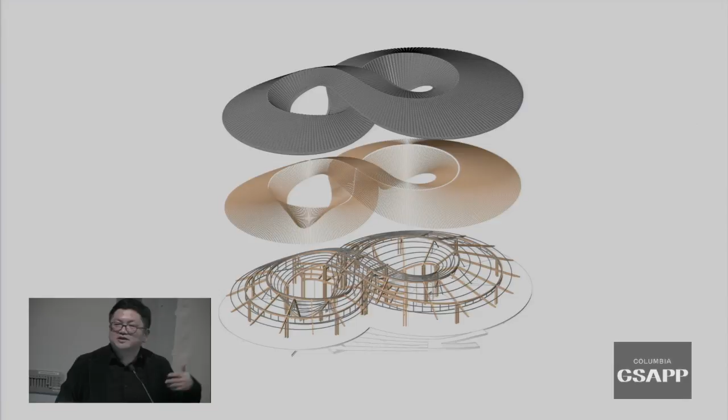So this shows the different layers. The special part is we collaborated with the same factory, teaching them how to use robotics. Although all the joints are different, they could make it easily because this project is easier than the previous one. But they know how to use the new tools to develop this kind of structure system.

So this is the real construction process. And we also have drawing sections, something like this.

So In-Bamboo shows a kind of Chinese philosophy, hidden and escaping from the town center, but collaborating with the vegetable field, with the trees and bamboos, hidden. It's a kind of scenery, a new screen for the buildings.

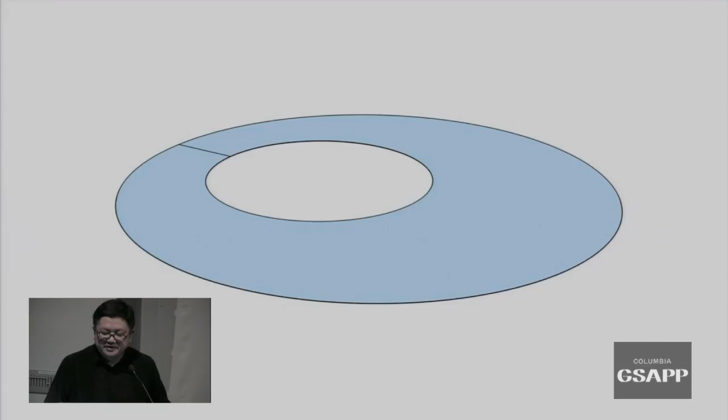We also designed the entrance pavilion, using bamboo as material for the geometry form-finding process. This one we collaborated with local craftsmen. The weaving process welcomes people as they enter.

From hidden, people figure out where the building is. And then we have two courtyards. One is a courtyard like this, the other is a pond.

We found a connection to make the public space, where special exhibitions and seminars are held in this community center. The roof is a local material, and the facade is woven bamboo.

So it's all from tradition, but actually uses some new technology to make a special feeling for the buildings. Also, local villagers are planting vegetables in the field, which creates a dialogue between the building and the field.

After graduation, they don't like to go back to the rural districts of China. And their husbands often find jobs in construction in the big cities. So there's actually no industry in the rural districts of China.

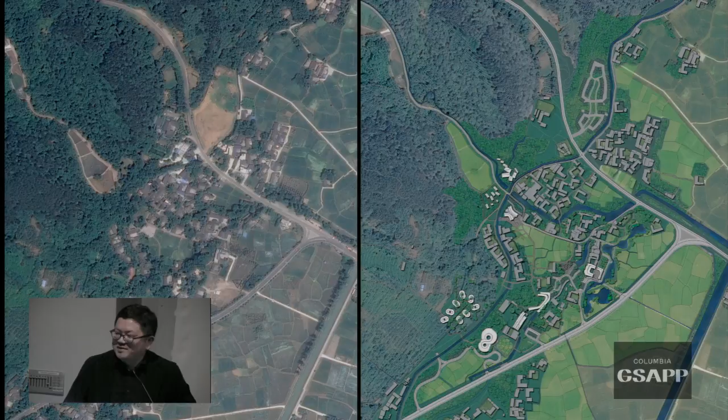So that is what I'm doing, and hopefully we can make some further discussion on this. So thank you, all of you.